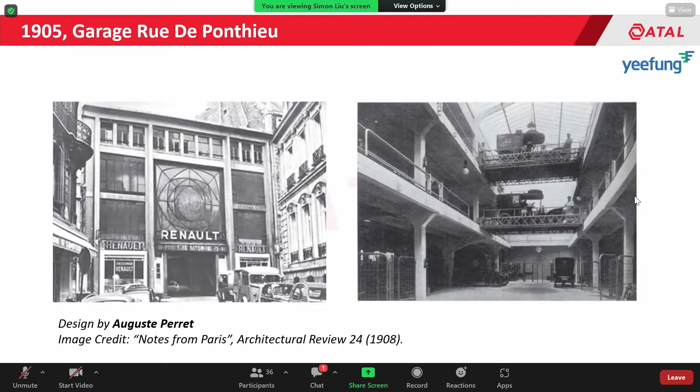The reason for the automation was also the same as it is today. The owner wants the smallest piece of land to park as many cars as possible on it. That's the core value and the key driver of the automated parking system, to solve parking challenges.

But of course, there's another key driver for the automated parking system: the smart mobility initiative. Smart parking solutions play an important role inside the smart city ecostructure by providing convenience, less city congestion, higher efficiency, and transparent mobility information. As core elements of the smart parking solution, sensing technologies, IoT connectivity, data analysis, and automation have become more integrated. Automated parking systems, especially robotic parking systems, with their DNA of including almost all the above elements of smart parking solutions, will evolve into more intelligent, flexible, and efficient solutions.

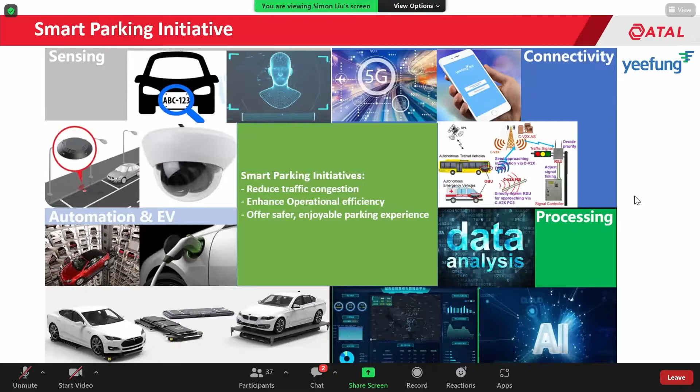Of course, there will be some challenges ahead. For example, in Hong Kong there are lots of regulatory challenges, but definitely it is the right direction and a good option for urban planners.

Let's have a quick view about the market potential and the segmentation in global and China. The global automated parking system is forecast to grow at a CAGR of 16.7% within the next 10 years, with key drivers being less land with growing vehicles and the smart mobility initiative. In China, over the last several years, there are around 1 million new automated parking spaces built per year.

In 2021, in China, the commercial and municipal segments are the two most important segments leading the automated parking system, and this year we believe municipal will have the highest growth. Hospital is the number 4 segment in China. There are lots of hospitals in China, and people choose to go to hospital rather than a conventional clinic like in Hong Kong, so hospital is also a very important segment.

Let's have a closer look at the Greater Bay Area, especially the 4 core cities: Shenzhen, Guangzhou, Hong Kong, and Macau, to see how the situation looks. Here we use the ratio of licensed vehicles to parking space as a key index. The workable ratio for a city is around 1.1, but in developed regions normally that ratio is 1.3.

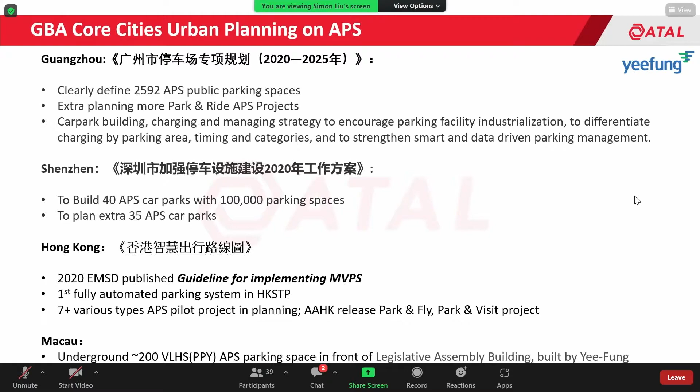Just as an example, Yee-Fung's automated parking projects are being built in these 4 cities. In total, in the Greater Bay Area, we have built 176 fully automated parking projects, including AGV parking which we will mention later. The total parking space is around 24,000, with Shenzhen having 81 projects and Guangzhou 41 projects. So you can see the different cities in the Greater Bay Area are moving at different paces.

Shenzhen in the Greater Bay Area is the most experienced from a city planning perspective using the automated parking system. In 2020 there was a survey asking users 4 questions. The first question: have you ever seen an automated car park in Shenzhen? 65% mentioned they have seen one.

The second question found 59% would like to park inside an automated car park. Regarding the biggest concern about parking in an automated car park, the first concern at 48% was worry about safety - I think not only for the car but also the human. The second concern was difficulty to operate, and those are the two key concerns for people using it.

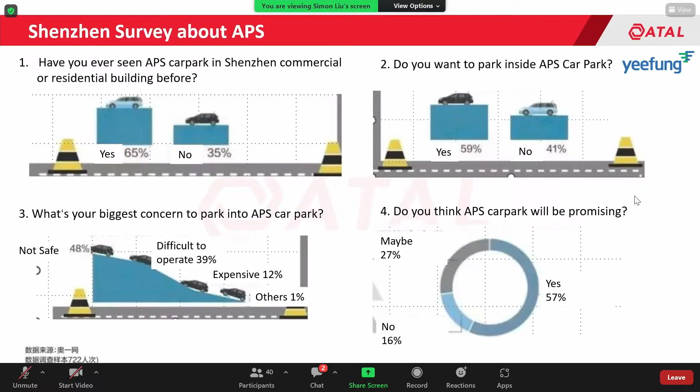Let's continue on the topic of user experience, using one fully automated parking project we did in Hong Kong as reference. The most basic definition to tell fully automated from semi-automated is that it's not just the automated equipment, but the fully automated system provides a dedicated transport cabin for people to park and retrieve the car, isolating people from the automation equipment.

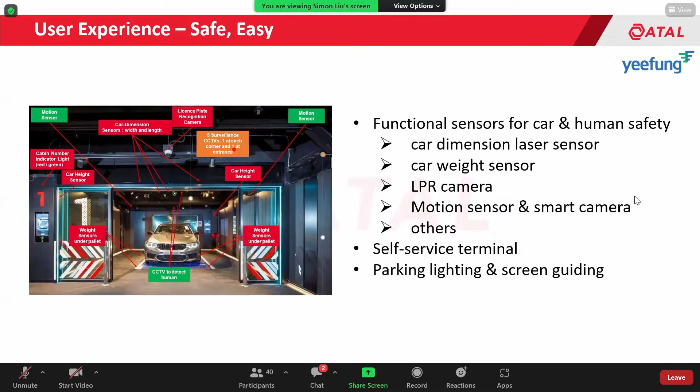Within this project, inside the transport cabin there are functional sensors for human and car safety, and also self-service terminals, parking lighting, and a screen guiding to help the user feel safe and have easy parking. The second point is that the transport cabin is very spacious and the design is very simple.

Especially for the disabled, the transport cabin is 5 meters wide. The car sits on a pallet, and the gap between the pallet and the platform is below 13 millimeters. That's a huge challenge for big robots to move into the cabin.

Also, for each transport cabin there is an emergency exit with an interlock to keep safety, and users can use mobile apps to remotely retrieve the car and also monitor the car retrieval and charging status. So that's the user experience again: safe, easy, comfortable, and smart. That's the user's perspective.

But the realistic perspective is that in the car park industry, and the automated car park industry, the purchasing decision makers are not really the users. So the user's perspective does not really align with the purchasing decision makers, who are the urban planner, developer, and investor. And this isn't just in Hong Kong.

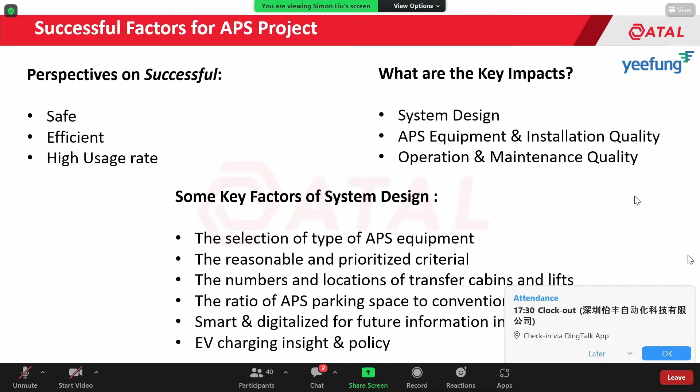There's another topic about EV charging, because there are more electric vehicles now. For example, in China, the regulation is pretty clear for conventional car parks, and the regulation for automated parking systems is also clear. But there's no regulation for EV charging in automated parking systems. So even now, it's not legally possible to use EV charging in an automated parking system. Maybe Hong Kong can take a further step here.

We talked about selection - there are lots of factors here. In the next phase, I will show some different types of automated parking system equipment. There are, I guess, maybe 6 or 7 main types of equipment, and no single type of automated parking system can replace all the others. Everyone has a reason to exist.

If we're talking about semi-automated parking, there's the puzzle and also the rotary system. The top part is the puzzle parking and the bottom part is the rotary parking. The good thing about these two solutions is that they are low-cost and quicker to implement, and especially for the rotary, you can have high space efficiency with a small footprint.

The downside is that you need to reverse park in a narrow space, and the driver walks in with the equipment, and especially for larger layouts, you mix pedestrians with the equipment. Especially for the rotary, energy efficiency is low, because if you want to retrieve or park a car, you need to rotate all the cars in a circle. For the same reason, the noise is bigger for the rotary.

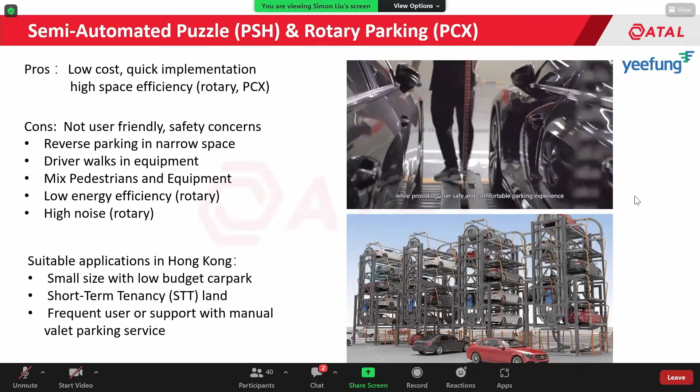Then we talk about the fully automated systems. There are also different types of fully automated parking systems. One of the major fully automated types, we call VLHS, or in China we call PPY.

It's horizontal sliding and vertical lifting. The advantage of this solution is that because it's fully automated, it has a dedicated transport cabin to separate the user from the equipment, so it's very safe. It also has higher parking density, because normally there are multiple parking floors, and faster throughput.

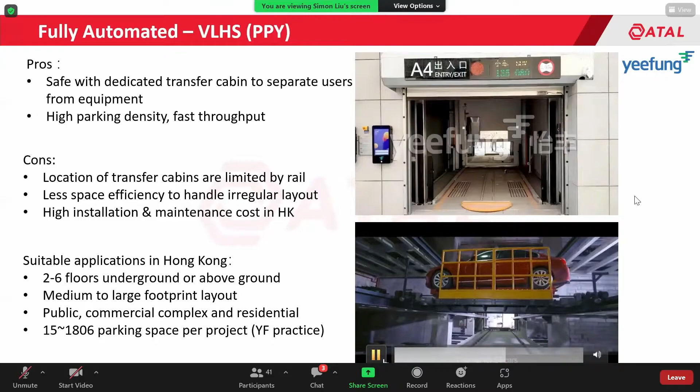The downside of this solution is that if you see the video, the shuttle is moving on a linear rail, so the location of the cabins has to be along the rail. For irregular layouts, the space efficiency will be low, because you cannot use the irregular space.

In China that's fine, but in Hong Kong and also, for example, in Australia, because labor cost is very high - especially in Hong Kong, you need a registered engineer to do that - the installation and maintenance cost is very high. It's suitable for application in Hong Kong from 2 to 6 floors, underground or above ground, and medium or larger footprint layouts - municipal, commercial complex, or residential projects.

Based on Yeefung practice, we have done a very small one, for example 15 parking spaces in the United States, and also the biggest one in China, 1,800 parking spaces, using the VLHS, the PPY solution.

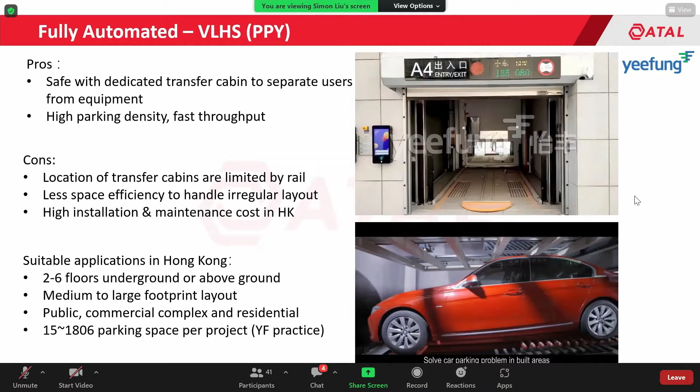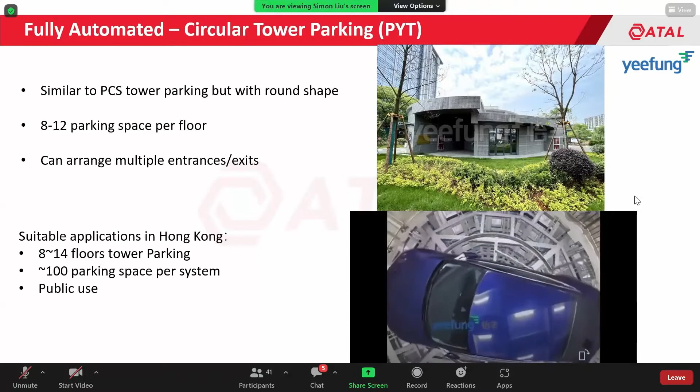In China there's one along 8 floors, but that's an underground project. So circular tower parking isn't common in the market, because you really need to find a layout that's suitable for the round shape of circular tower parking. It's good technology though.

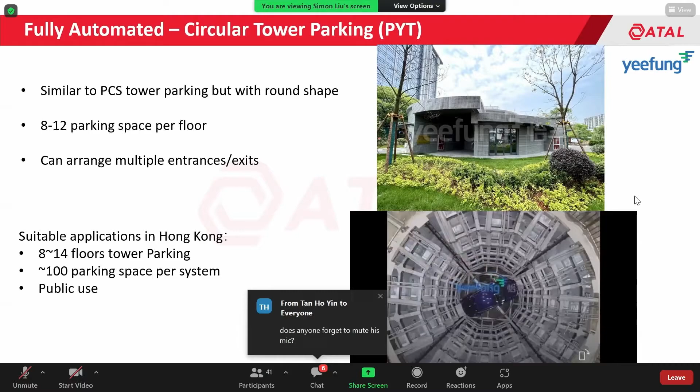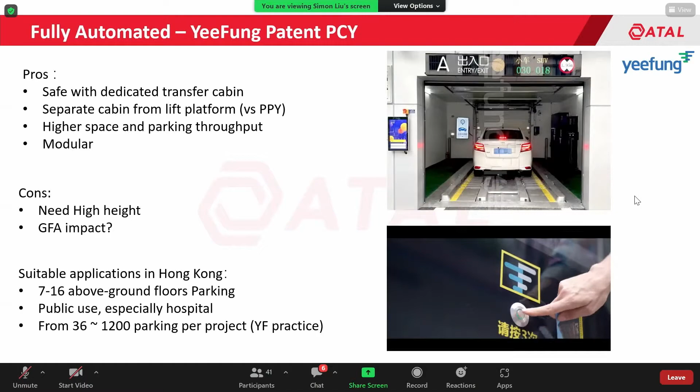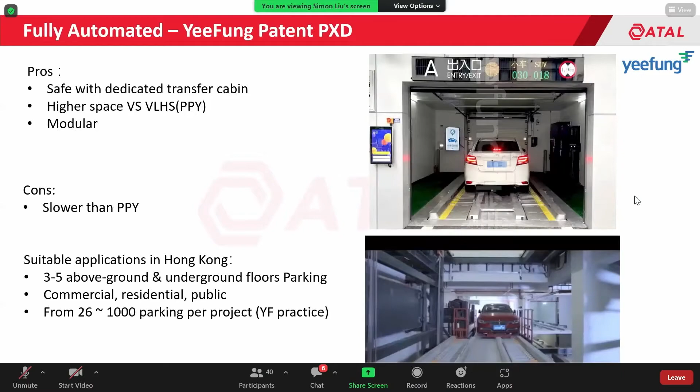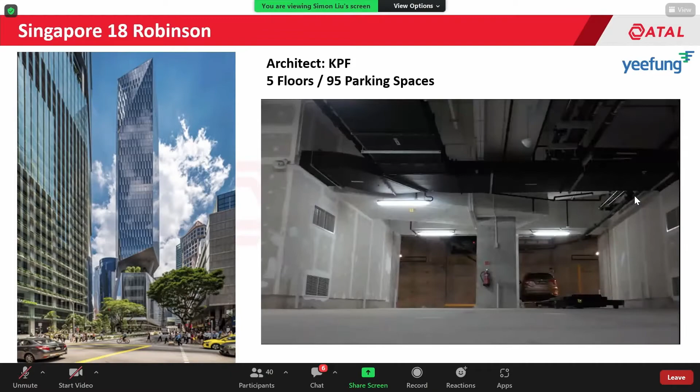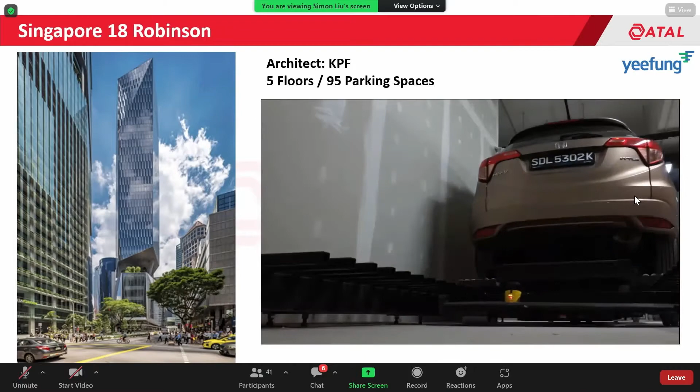The architect is KPF. It's 5 floors with a total of 95 parking spaces. The shape is more like an irregular shape, more like a pear. It's quite not possible to use other mechanical or manual parking, so AGV parking is a very good fit, and actually the only solution for this project. If you go to Singapore, you can maybe pay a visit.

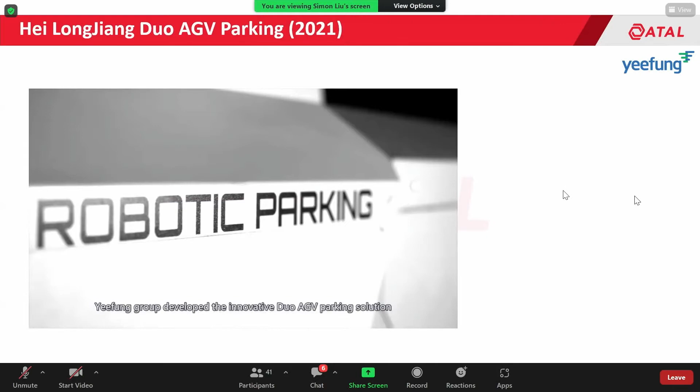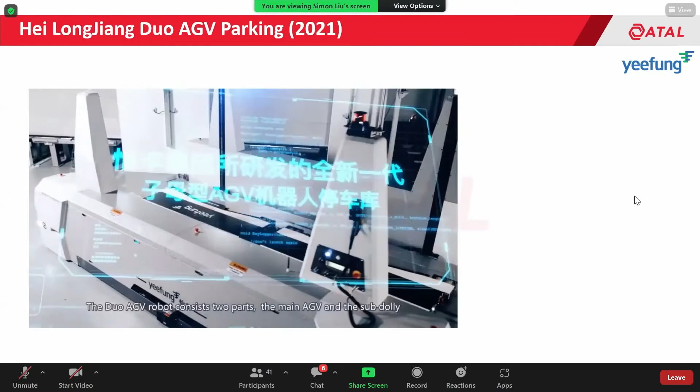2 years ago, Yeefung launched a double-decker AGV, and this AGV can handle 2-floor parking. You can see they can do self-rotation, and they can do the second floor lifting.

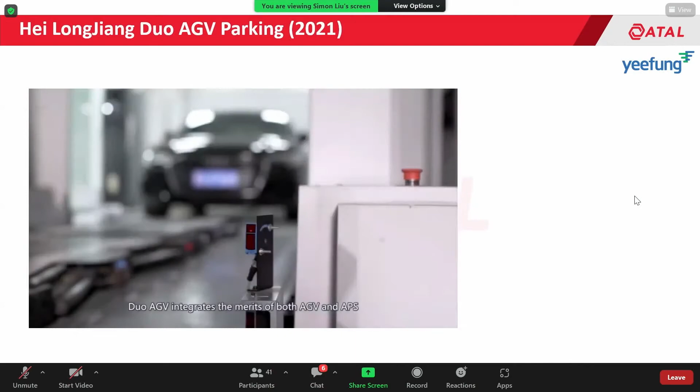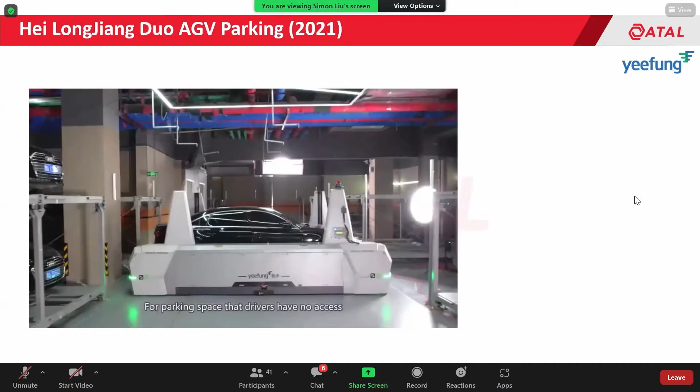This solution is very good compared to other 2-level parking solutions, because they offer very safe and comfortable parking.

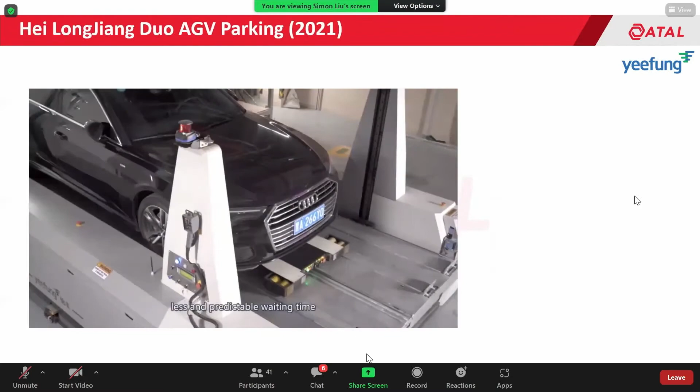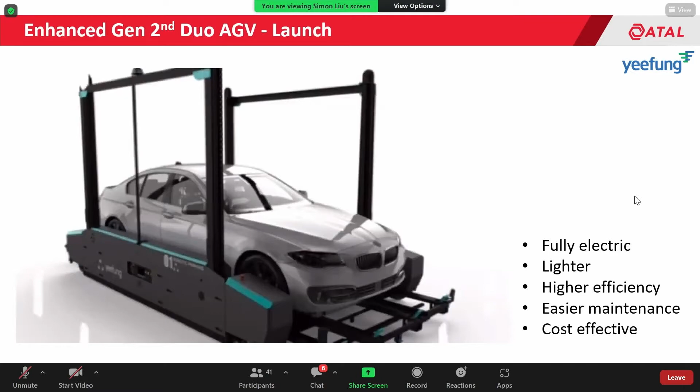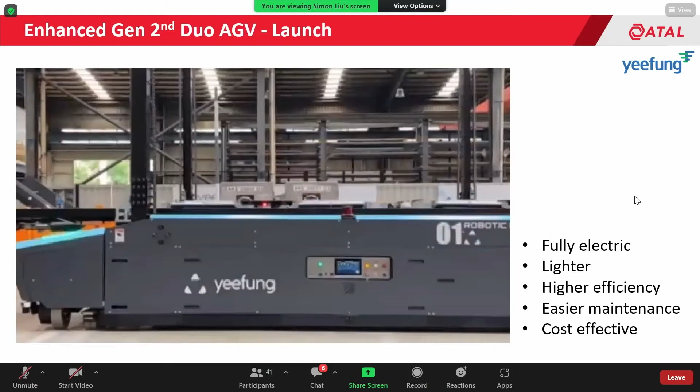Early this year, we launched the second generation double-decker. The difference from the first generation is that the lifting became fully electric, and the total weight of the AGV became 30% lighter, with high efficiency and easy maintenance. We just did a big project based on this solution. I guess maybe 2 or 3 years later, you will see that project in Hong Kong.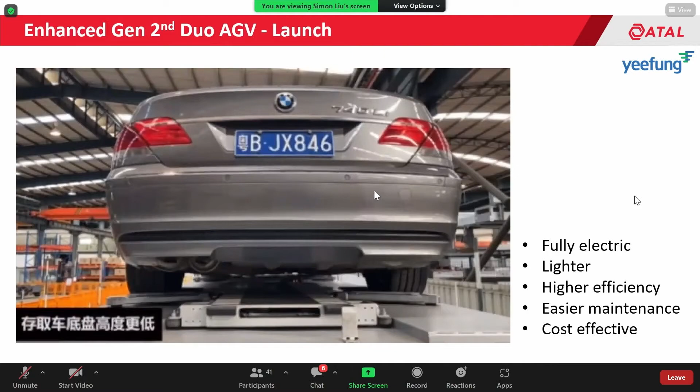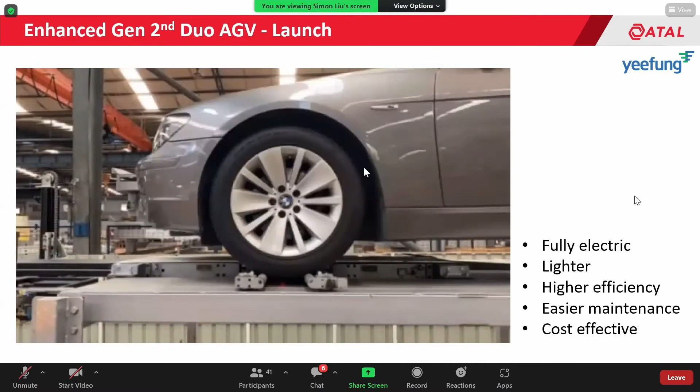In the comb solution, for every parking space, we need a comb structure. The comb AGV solution is fast, but you need the comb structure, and you need very high accuracy control. This is a project we did in Hong Kong.

For this AGV solution, you need a pallet, and because it's a double decker, you need a car rack. We call this solution the ARK AGV, the third generation Ark. For this solution, you can directly park on the floor, and the robot also operates on the floor. So you don't need the pallet, you don't need the comb, the parking operation can be directly on the floor.

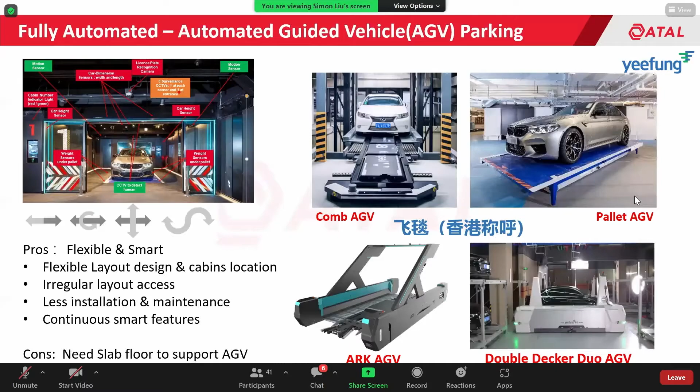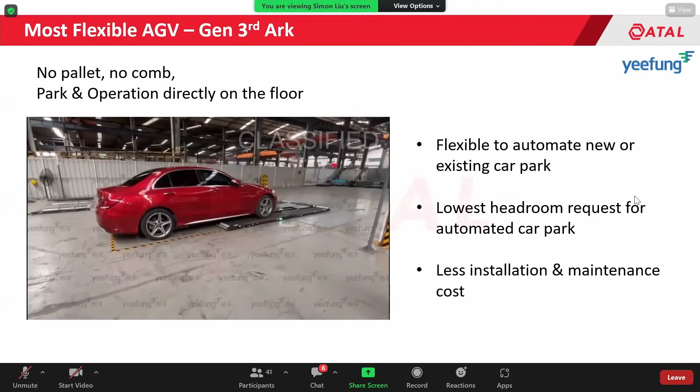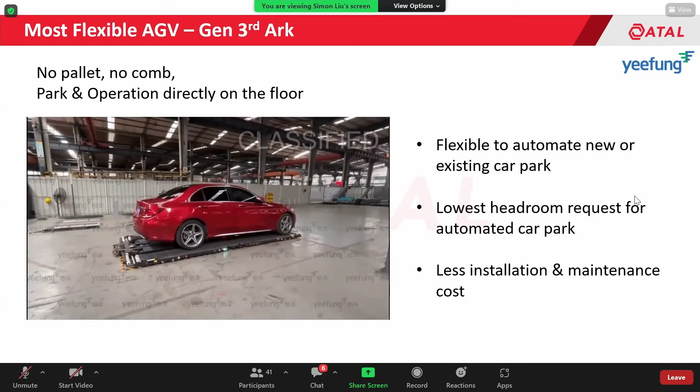So that's the latest AGV parking form, and also the most flexible AGV in the world. Just imagine you can use that solution to automate a new or existing car park. What do you need? Just the cabin, because inside the car park it's the same as a conventional floor. So it's very flexible, and also the headroom is the lowest right now in the industry.

Also, the installation and maintenance cost is lower because there's no need to install tracks, no need to install the comb, no need to install the pallet. So that's the latest solution in the world to define the most flexible cabin parking solution.